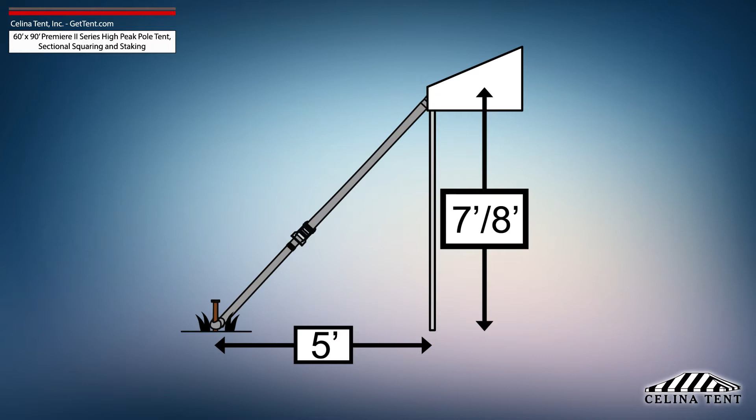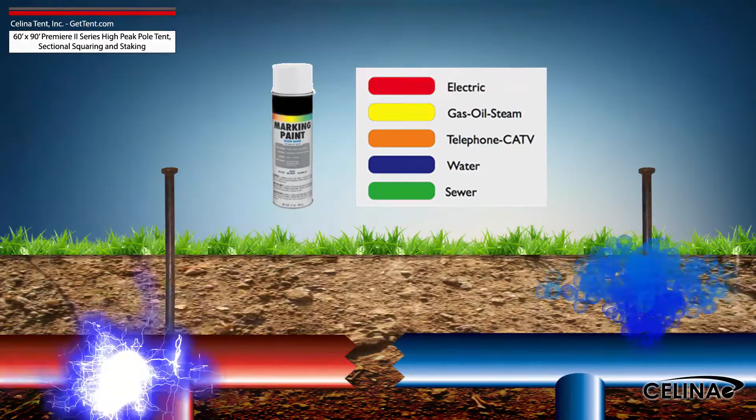Tent squaring allows the installer to accurately place all tent hardware and install tent stakes prior to beginning setup, and helps them avoid any marked underground utilities. Utilities must be marked by your state's local utility services prior to any tent installation.

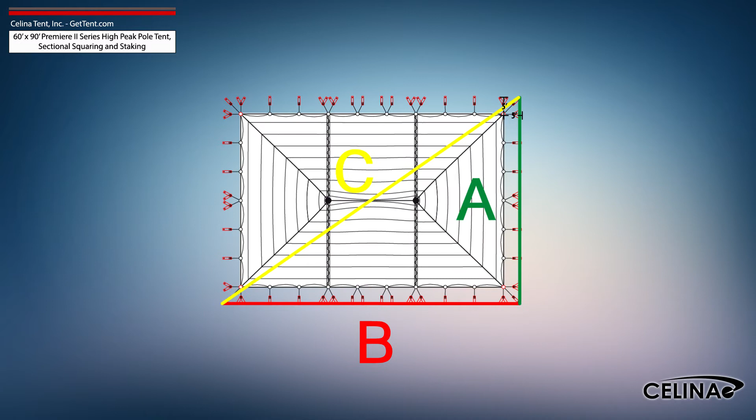Using the Pythagorean theorem and adjusting out for 5-foot staking, the entire tent footprint will be 70 foot by 100 foot, with a 122-foot diagonal length.

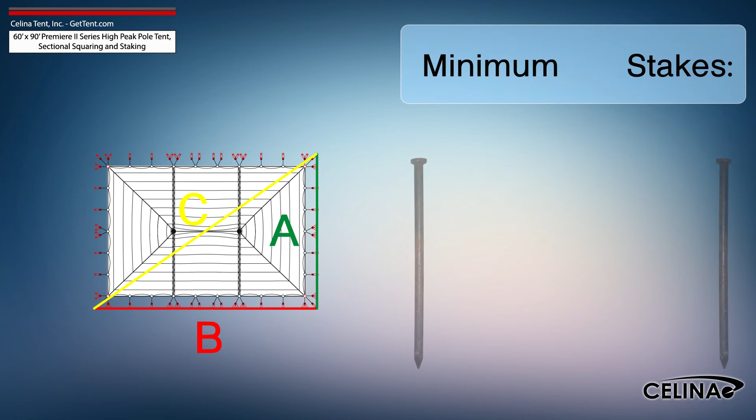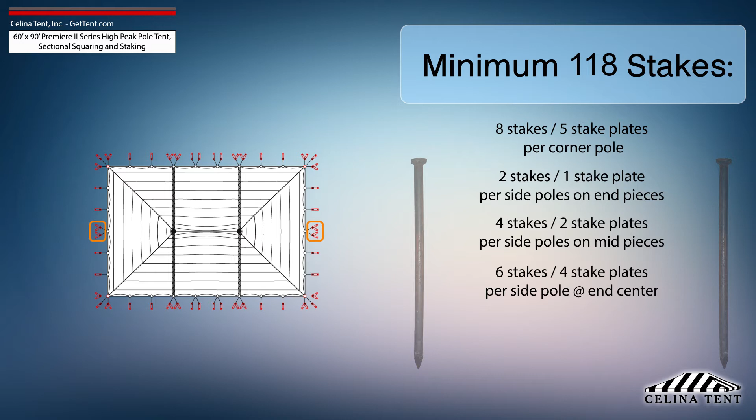Celina recommends that a 60-foot by 90-foot Premiere II Series high-peak pole tent receives a minimum of 118 stakes: 8 stakes and 5 stake plates for each corner pole, 2 stakes and 1 stake plate for each side pole on end pieces, 4 stakes and 2 stake plates for each side pole on mid pieces, 6 stakes and 4 stake plates for the side pole at the center of each end, 6 stakes and 4 stake plates for each side pole at lace line locations, and 1 stake at each center pole.

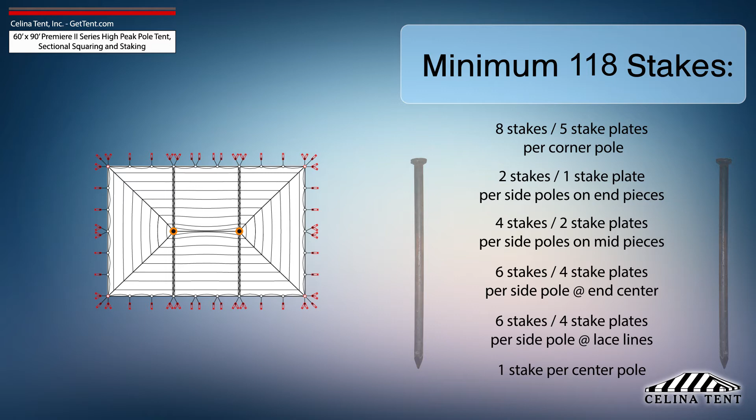This amount of stakes provides the minimum amount of security for a pole tent of this size. Additional staking is required for any site that doesn't meet optimal soil conditions. Tent staking is the most important safety procedure during tent installation.

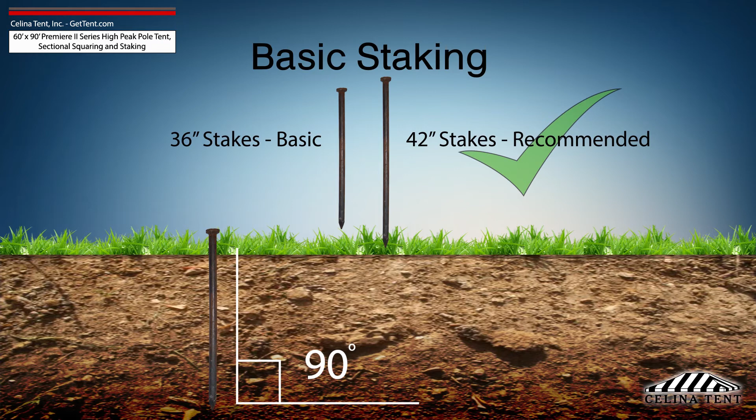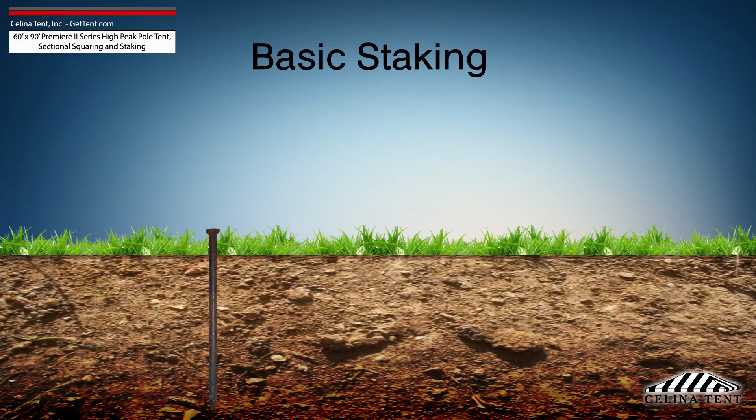Tent stakes should be driven vertically so that the stake is as close to the ground as possible with space to tie on a strap. Any length of stake protruding from the ground that is more than 6 inches will have detrimental effects on the holding power of the stake. Attach the ratchet strap or rope as close to the ground as possible to reduce strain on the stake.

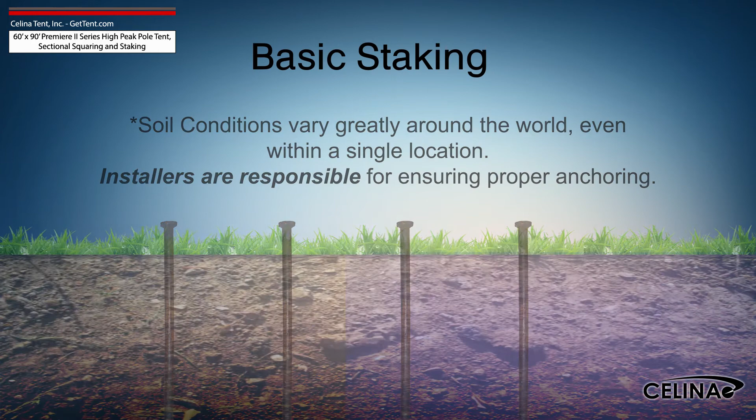It is the installer's duty to inspect the soil conditions and possible weather effects for the duration of the tent installation. For water-saturated or loose soil, more tent stakes are required to achieve adequate anchoring. Staking may be increased using dual stakes and a staking plate, or gang staking utilizing 2 staking plates and 3 stakes.